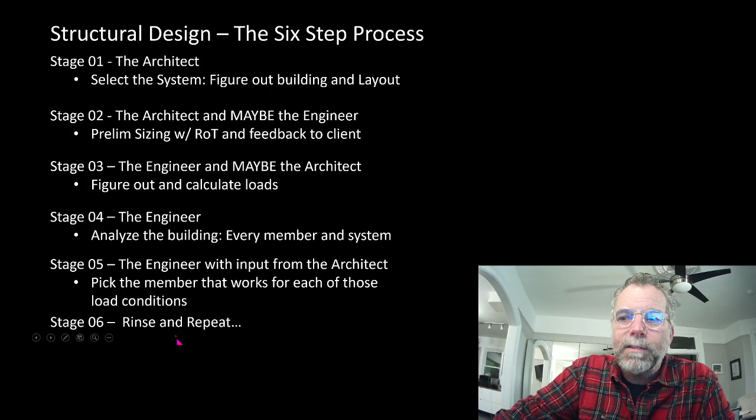Here's why we do the rinse and repeat: the member sizing that the engineer determines is going to feed back into the structural systems. It's going to have an effect on column layout, and on floor-to-floor heights. All of these things feed back into the architectural design and require modifications, which then feed back to the engineer to change. So there is a cyclic process that converges to a final answer, but we don't start there. It's non-linear.

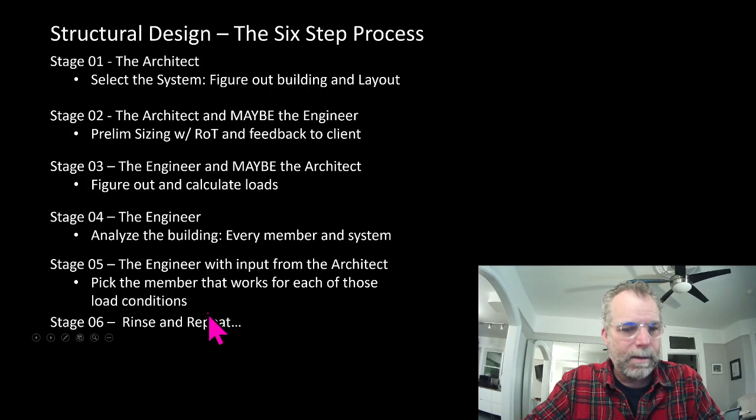So our project, this is a Center for Activism building in New York City. There is an adaptive reuse component. In an old city like New York, there is always some existing structure on every site. There aren't greenfield sites within the city of New York. And it's intended as a net zero building.

So what are the kinds of spaces that we're going to need to think about in a Center for Activism? We know there will be a big administrative function. Administrative functions need offices, so we are going to have office space, and that's going to be one type of space within the building.

We are going to have a lecture hall, almost certainly. If you're going to have a Center for Activism, you need to do community outreach and teaching, so there's going to be a need for a lecture hall. We're going to need an assembly space. This may or may not be the lecture hall, someplace to host parties and other kinds of events, fundraisers, things like this may very well be in the space.

And then there's all kinds of supporting function. There's parking, there's loading, there's all these other things that have to happen within the building.

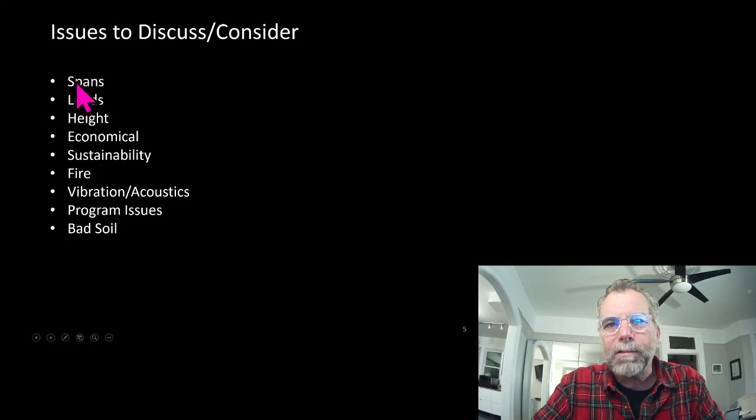So here are the things that we would have to think about. We have to think about spans. That's number one, because it's the first thing we think about, since span demands for residential versus office versus assembly differ. We also need to think about loads, because assembly areas have different loading requirements than office areas or residential areas.

We need to think about height. Height is critical, particularly in an urban setting, because often we're trying to maximize site density, and we are often within a very strict zoning envelope. So we're going to have specific height requirements for spaces. Lecture halls need tall spaces, for example, and that's going to affect our structural depth.

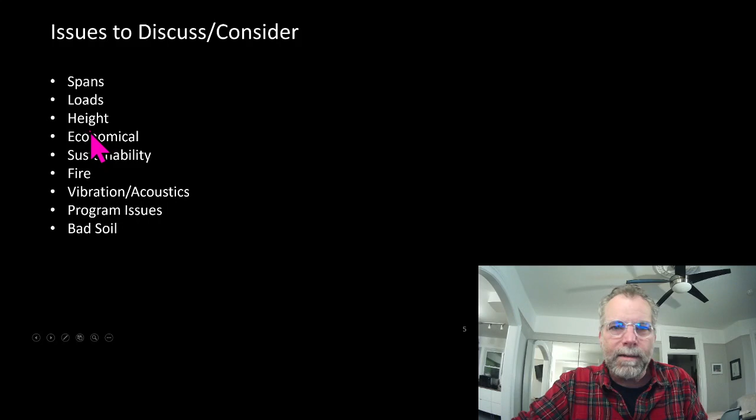Obviously, we need to think about economy. Economy is often, or historically has been, the number one consideration. We need to think about sustainability. This is 2021, it should be the number one consideration.

We have to think about fire. Our project has to be code compliant, and code has very specific fire requirements, which has a big impact on structure. Vibration and acoustics go to the performance of the building, the user experience.

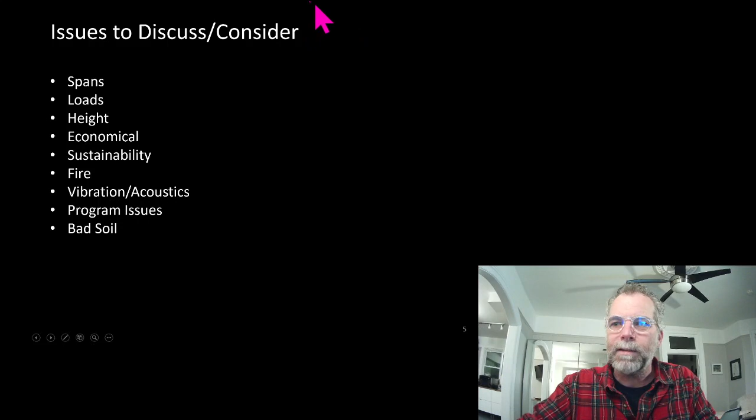Program issues we've talked about, and then we have to think about the foundation conditions. In an urban site, particularly an old city like New York, you are not the first person to build on that site, so we are going to be in infill conditions almost certainly. We are going to encounter existing foundations, and there will be site challenges.

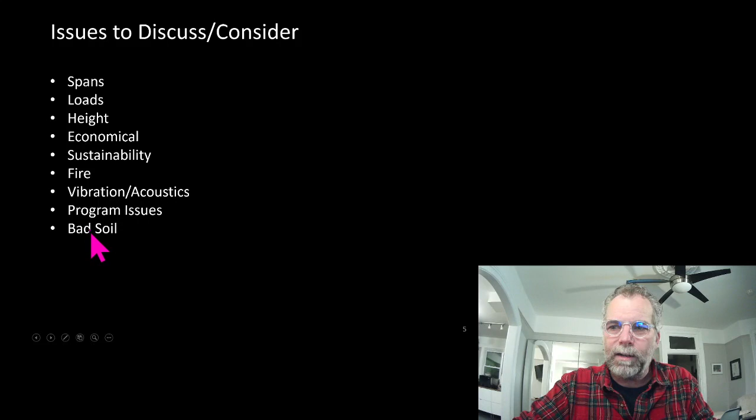So this is the next long list of considerations, the things that impact structural decisions on a building. First one is the loads. We have wind loads, we have occupancy loads, occupancy being the people, we have snow load on the roof, and we have seismic loads.

In New York, wind is probably the dominant lateral load. I'll just take a moment to point out that if we're sandwiched in a tight urban site, we don't get to design it as though we're shielded from wind. We have to consider that one or both of the adjacent buildings are going to be demolished, and we are going to be standing there on our own. So the tight urban nature of the site will generally reduce wind speeds, but the immediate context does not.

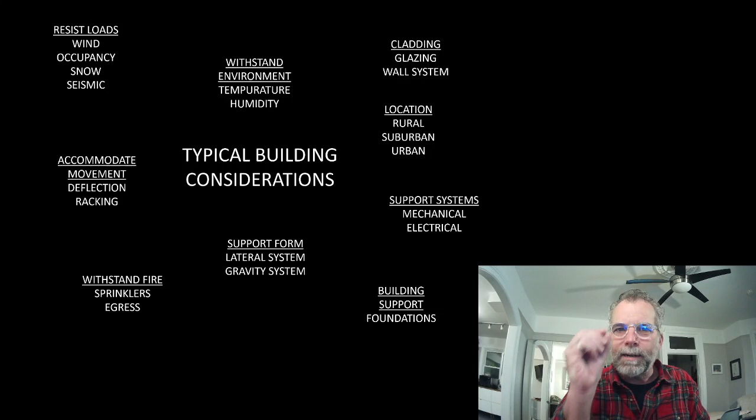We need to accommodate movement. We really have to think hard about movement. As buildings get narrower and taller, we're tightening our considerations, and movements become more and more important to think about. So that's movement relative to adjacent buildings, for example.

We have to think about fire, of course. We need to withstand the fire, and we need to maintain our fire compartments. We need a structure that will not collapse before all the people get out. We can't design a structure that won't collapse at all—they're all going to collapse eventually in a fire. But we need to make sure they don't collapse before everybody gets out. A critical part of that is maintaining our fire compartments, preventing the fire from spreading from one part of the building to another. The structure plays a role in that.

We need to withstand the environment. Now, a building like this, probably the structure is enclosed within the building envelope, and the environmental conditions are consistent throughout the life of the building, so there's not an awful lot. Where this becomes important is where we have transitions from interior to exterior. For example, we have to think about the environmental impact of uninsulated canopies, projections, and things like that.

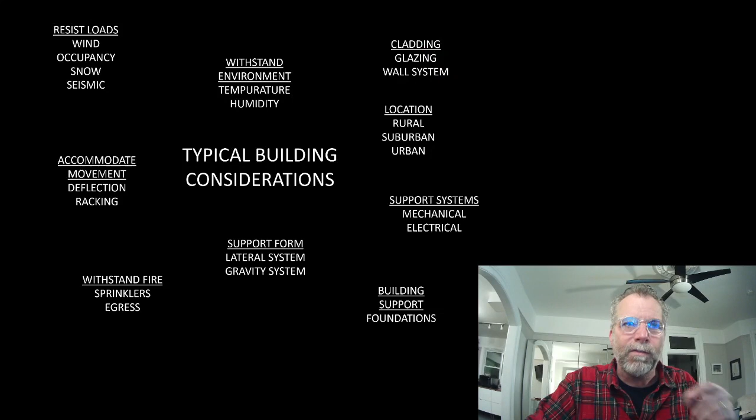We need to provide support for lateral and gravity loads. That's normally what we think of as the number one consideration, our lateral and gravity system. Structure also plays a role in supporting your cladding and wall systems, and the integration of those systems is an important consideration.

We think about the location. As I talked about with wind, there's a difference between a rural setting, a suburban setting, and an urban setting. An urban setting means we get slightly lower wind loads because the density of the features tends to damp out the wind a little bit. It does mean, though, that we don't get snow blowing off our roofs as much, and what snow falls, sits.

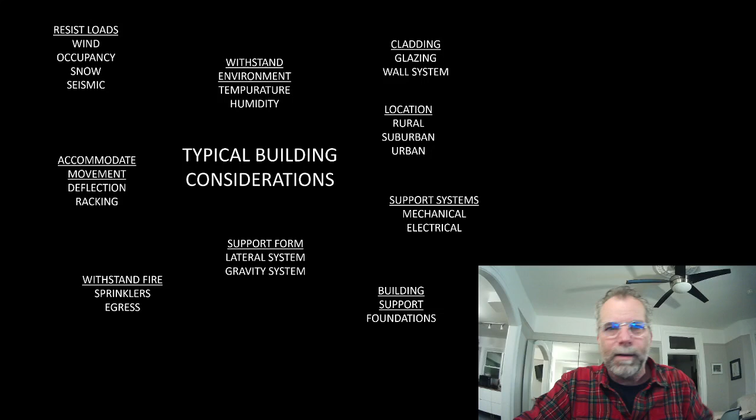We have to think about secondary support systems for mechanical and electrical equipment—so we'll have mechanical units on the roof, for example, that we have to think about. And then lastly, or firstly, we have to think about the building foundations.

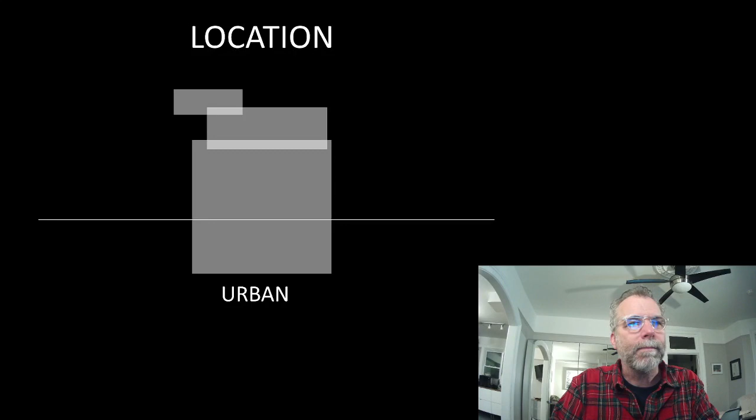So let's talk about spans. For a residential building, the norm is about a 6.5 meter span. It was always a 6 meter span, but developers have pushed that to improve the quality of space in residential buildings, where 6.5 meters is actually very common now, or 6.6 meters.

We're not in residential space. The absolute standard office grid is 9 meters by 9 meters. That's not to say some don't differ. 80 Atlantic, for example, is that wonderful mass timber building built last year by Quadrangle—that's a 6 by 6 bay. It had to be because of the structural system that was chosen.

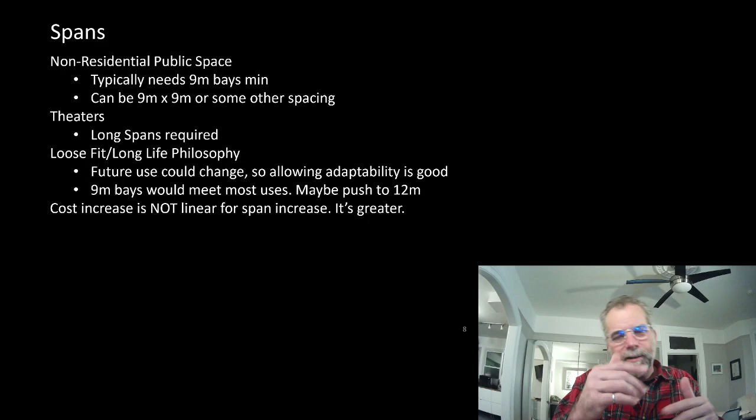And we've got luxury office buildings downtown that are 9 by 12 meters, for example, to get more depth to the core without interruption for light penetration and things. So 9 by 9 is not all office buildings, but I'd estimate it's 80% or so in a 9 by 9 bay. 9 by 9 is also very common for parking, so there's a nice integration of office over parking that happens in a 9 by 9 bay.

Theaters, lecture halls, assembly spaces often require longer spans. We don't want a lecture hall with a 9 meter bay—that'd be a very small lecture hall, and we don't want columns interrupting views. So in those types of spaces, we need longer spans. Obviously, spaces like gymnasiums need longer spans too.

We need to think about a loose fit, long life philosophy. The current use might be residential, say, so you could live with a 6.5 meter span. But if you look at downtown New York, or downtown Toronto—like the Garment District, for example—at the stock of existing buildings, a well-designed building with a 250-year life, which is our target, is going to go through multiple uses. It might be residential today, an office use tomorrow, something else after that. So it makes sense to design something generic, flexible, and adaptable.

We also should think of loose fit, long life in terms of the ability to adapt to future uses. Some materials are easier to adapt than others, and I'll elaborate on that a little bit.

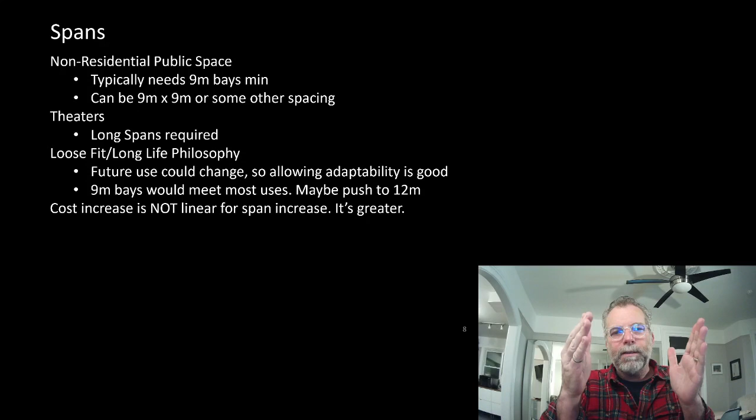I do want to point out that cost is not proportional to span. Cost is not proportional to building area, for one thing—if you change your spans, your cost changes even though your building area doesn't. Also, your quantity of material is not linear. So if you have a 10% increase in span, you might have a 20 or 40% increase in material to accommodate it, depending on what is governing the member size for that particular span.

So let's look at the various building materials. If we're talking about long spans, steel is the king for long spans. Steel can also accommodate very heavy loads.

A 9 meter span needs a depth in the 450 to 600 millimeter range, a 12 meter span is no problem at 600 to 800 millimeters. Very long spans, huge girder spans, 18 meter spans, all of these things are possible with steel. We can manufacture plate girders that are meters deep. You can see them in bridges and things. So steel is the king for long span because there is almost no limit.

Part of the reason is that steel is light as a percentage of the load on the building. So increasing the size of the steel doesn't actually increase the demand on the steel all that much; the demand is dominated by the other loads. It's also flexible for future use, so it's easy to change steel. You can cut out pieces and weld in new pieces in the field, and you can strengthen things if you need to.

When we're designing a steel building, we start with our deck and work down from there. So the decision—this is interesting.

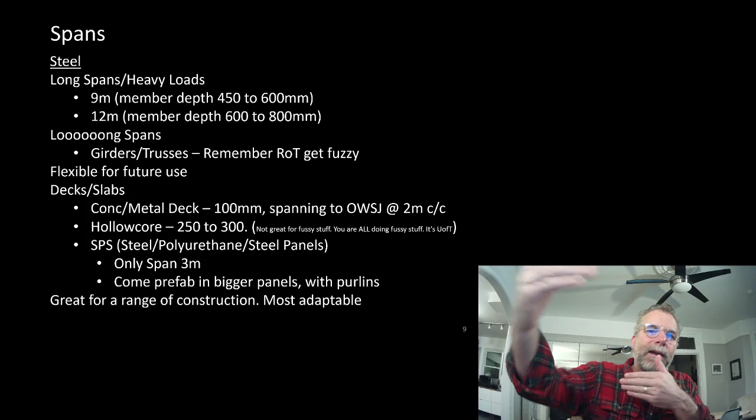That will span 2 meters or maybe a little bit less. The span of the deck sets up the spacing of our joists. Those joists then have to be supported by something—they're supported by girders. The span of the joist sets up the spacing of the girders, and the span of the girder sets up the spacing of the columns. So we start with our deck and we move down.

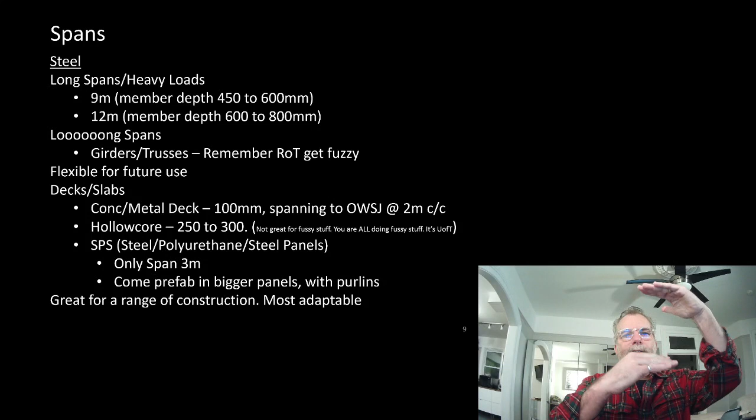Another system that is very economical is hollow core structural concrete. Hollow core concrete is 250 to 300 millimeters in depth, with big circular voids in the middle.

Remember, your mouse needs to be over here. Oh yeah, I am going to point out—

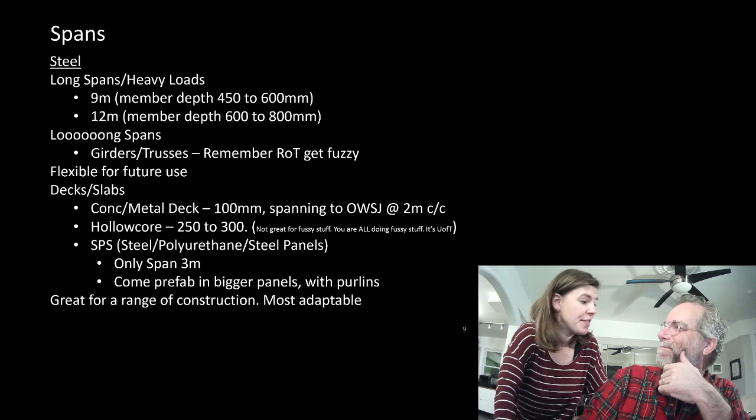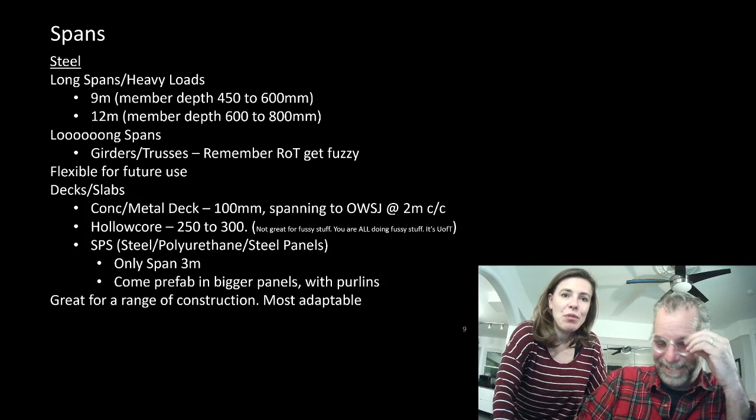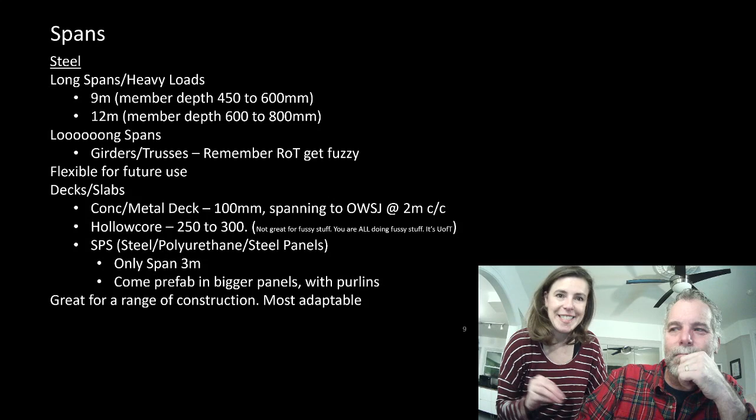Sam is not a fan, and I feel like many of the U of T profs I've encountered are not a fan of hollow core. Yeah, I'm very much not a fan. They're not a fan of bubble deck either. We're telling you this because we feel we have a responsibility to let you know what's out there. The worst thing would be for you to go out and build these things badly. Are we saying concrete is good, or the best? Probably not—sometimes concrete is the best if you could ignore the environmental costs. But the worst would be for you to build these things badly, so we want you to at least know they exist, but maybe we should be trying to move away from these things.

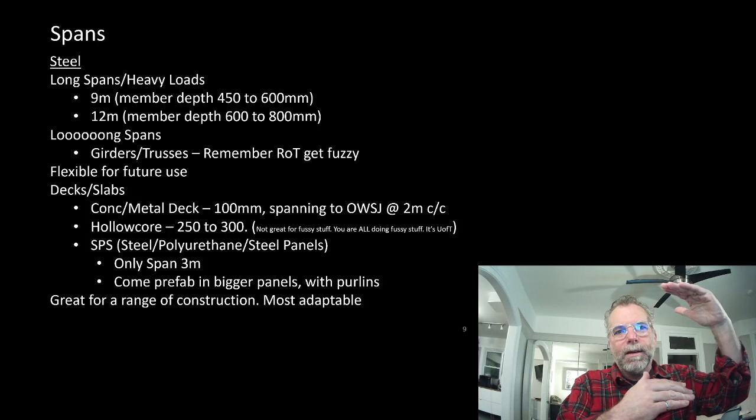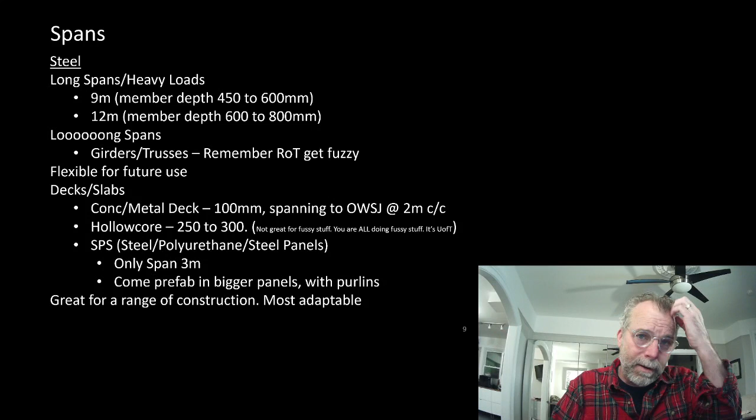So hollow core, 250 to 300 millimeters thick, roughly 30 to 50% of that is void. So a 300 millimeter thick hollow core is really only 150 to 200 millimeters of concrete because so much of it is voided. It's very effective in that respect. It'll span a long way—30 to 40 times its thickness. At the upper end, a 300 millimeter hollow core will span 12 meters.

This saves an awful lot of extra stuff like intermediate steel. We could put the steel in and save on the hollow core, but all the steel needs to be fireproofed, and all the steel gets in the way of distribution of mechanical systems. So there's something really positive about having a clean, clear soffit.

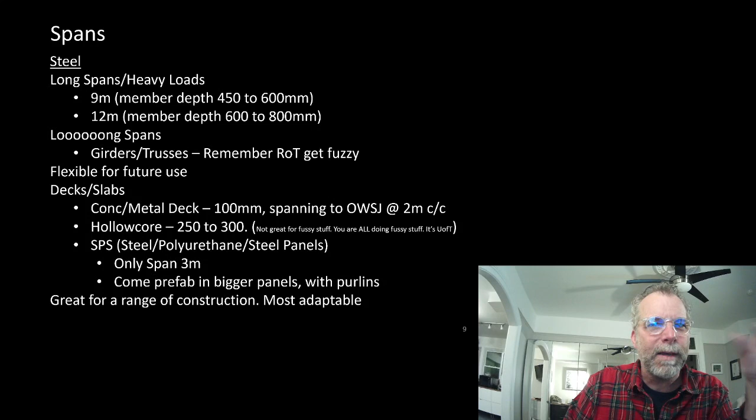Another system which has not taken off, but has tremendous potential, is the SPS system. SPS stands for steel polyurethane steel: thin steel plate, polyurethane core, thin steel plate. It's a sandwich system.

SPS spans about 3 meters, but it comes panelized with purlins already, so you wind up with a deck element that's 3 meters wide, 12 meters long. It gets dropped in very quickly, and it's very, very lightweight as a structural system.

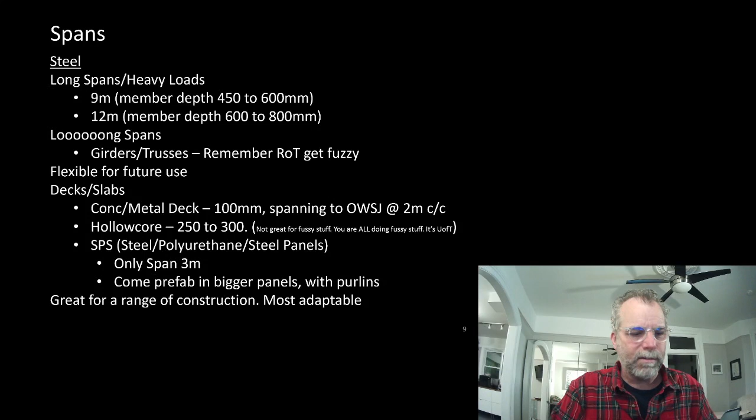Let's talk about mass timber, or wood. This almost should be 2 different slides, because there's mass timber and light wood framing, and they are not the same. They're as different as concrete and steel.

Light wood frame is small dimensional pieces arranged closely together with a thin deck of plywood or oriented strand board. It's suitable for single-family homes and multi-story residential up to about 6 stories with a degree of fire protection.

Light wood frame is combustible and needs to be fire protected. It has 0 inherent fire resistance. So if it starts, it burns. That's it. We consider it to give 0 time for people to evacuate the building.

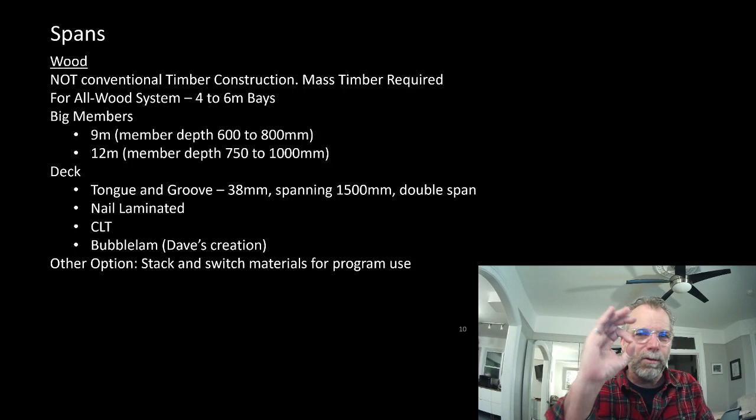Mass timber, as a basis, is characterized by large dimensional pieces glued together in solid elements with flat surfaces without a lot of protuberances. So you might have a beam, but you don't have a lot of beams close together.

Mass timber has a fire rating of 45 minutes without doing anything. So right off the bat, people in a mass timber building that catches fire have 45 minutes to get out before there's a risk of collapse. And we can add fire rating simply by making things a little bit bigger.

So mass timber and light wood frame are very, very different. Mass timber inherently has an inherent level of fire safety, and I'm going to talk about that.

This is the span section. I just wanted to say that mass timber and light wood are not the same thing.

Wood systems, mass timber and light wood, are typically good in the 4 to 6 meter bay range. That's not to say you can't do more, but that's their sweet spot, which sounds problematic for a use that has office use in it, requiring 9 meter bays. To get up to 9 meters, we're talking about big numbers.

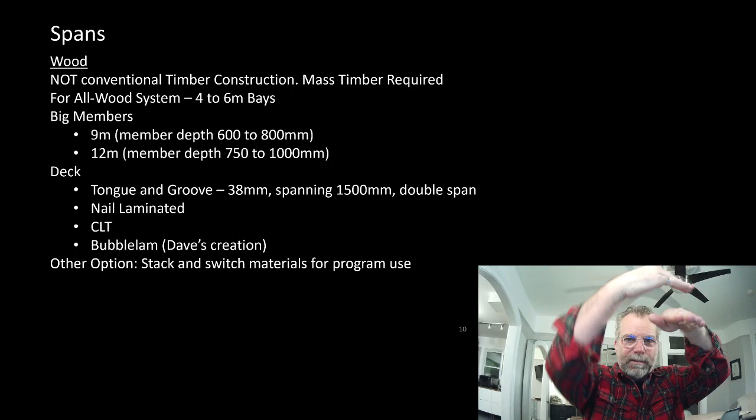Dowel laminated deck is similar, just using wood dowels instead of nails. CLT, cross laminated timber deck, uses 2x elements layered and glued together in the shop, then brought in as a panel.

Bubblelam is something that our office developed. This is a composite of steel, mass timber, and concrete. The idea is it gets rid of the beams.

So it's a mass timber panel with a roughly equal thickness of concrete on top. The concrete is voided with bubbles, like bubble deck. The idea is that it's for an asymmetric span.

In the long direction, it's composite, with wood and concrete acting together. In the short direction, perpendicular to the wood fiber and perpendicular to the wood joints, the wood doesn't do anything for you. So in the short direction, you're just a thin, wide concrete beam.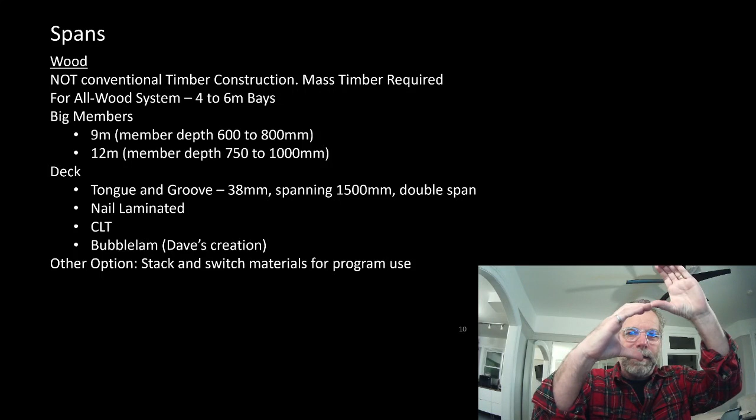By doing that, we have no drops underneath. There are no beams that drop below the wood in the bubble lam system. So the sandwich of wood and concrete is thickish, but overall the system is thin because we don't have the beams.

Got to talk about concrete and the environment for a second. We have a very uncomfortable relationship with concrete because concrete is the best building material, which I am going to get shot for saying. It's flexible, fire safe, durable, long spans, thin floor-to-floor height, good for acoustic noise transfer, good for vibration. Concrete checks all the boxes as a building material.

Here's the problem with concrete. Cement production accounts for 8% of global greenhouse gas emissions. One material accounts for 8%, because the production of cement is so energy intensive, and we use an enormous amount of it. I heard a statistic that China every single year builds as much with concrete as the US has ever built.

Enormous amounts of it. We have a worldwide sand shortage. There are sand cartels. There are people being killed over sand. The dredging and mining of sand is doing extraordinary environmental damage. Desert sand is no good for construction—it's too smooth. The wind wears it all into round marbles that don't lock together.

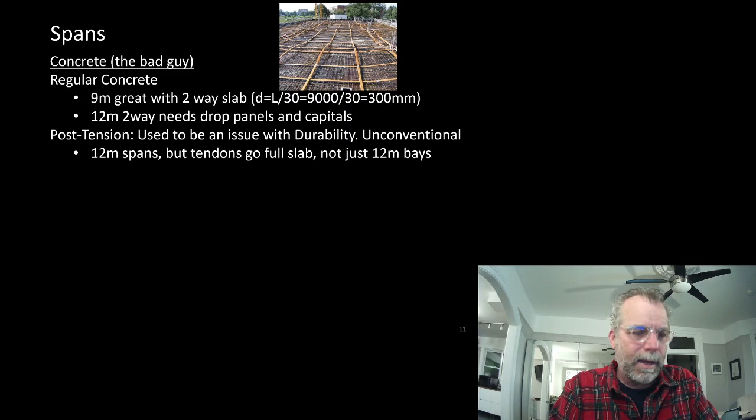From a span point of view, concrete is ideal. Like 9 meter spans, featureless, flat, clean soffit—there's nothing better than that for distribution of mechanical systems and penetration of natural light and everything else. 12 meters if you introduce drop panels and capitals. And if we want to go farther, we can introduce post-tensioning and easily get up to 12 meter bays.

We can use bubble deck. Bubble deck is a system that incorporates plastic balls—recycled HDPE plastic balls cast into the concrete—whose whole purpose is to void out all of the concrete that is not contributing to strength. So for strength from bending, the top and bottom is very effective.

The middle's not really doing very much. From a shear point of view, where we need what's in the middle, we only get something like 30% utilization, meaning we've got a lot of extra capacity in shear typically. So we put in all these voiding balls—we just take out what we don't need. And it's recycled; we're encapsulating recycled plastic, which is also a good thing.

Because it's 30% lighter weight, that means we can achieve about a 15% longer span with the same thickness, or for the same span, we can be about 15% thinner.

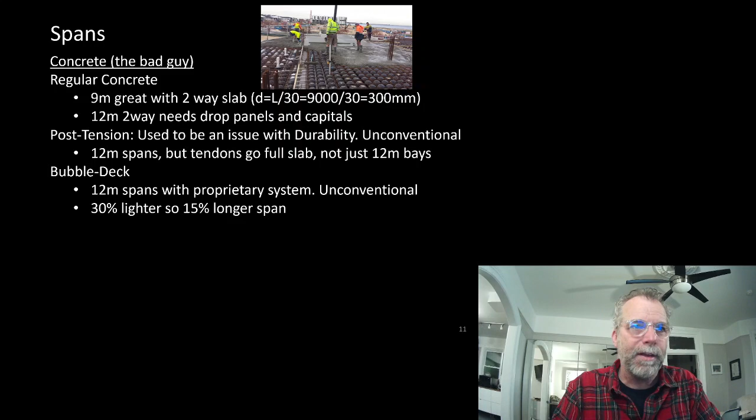Waffle slabs and beam slabs are also very effective—we can stretch out our spans and minimize material. But it's formwork intensive, and being formwork intensive makes it expensive. We're a labor economy, and anything that adds labor to the project drives up cost.

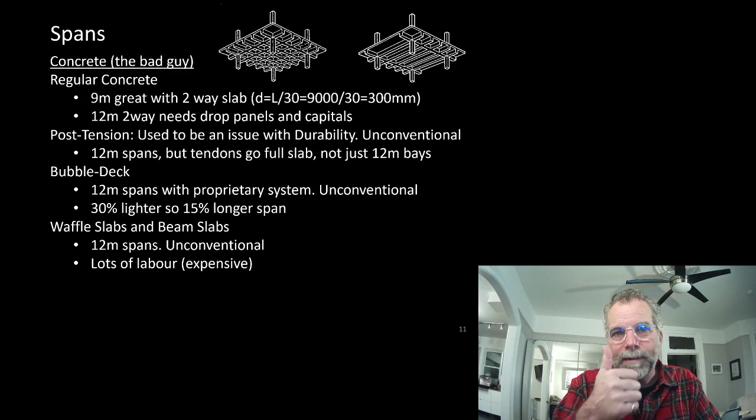So let's look at loads. For occupied public space, we generally have 2 load categories. We have 4.8 kPa, 100 pounds per square foot, for assembly areas. Assembly area includes any space on the ground floor, but also any exit corridors, stairways, anywhere people can wind up densely accumulated, as well as the obvious intended assembly areas. And 2.4 kPa for office spaces, reading rooms—like the upper floor restaurant space, as long as the area is not too large, are 2.4 kPa.

Heavy loads favor weak, stocky systems. That sounds strange, right? Why would we want a weaker system for a heavier load? Well, it's not that we want a weaker system for a heavier load. It's that the longer the span...

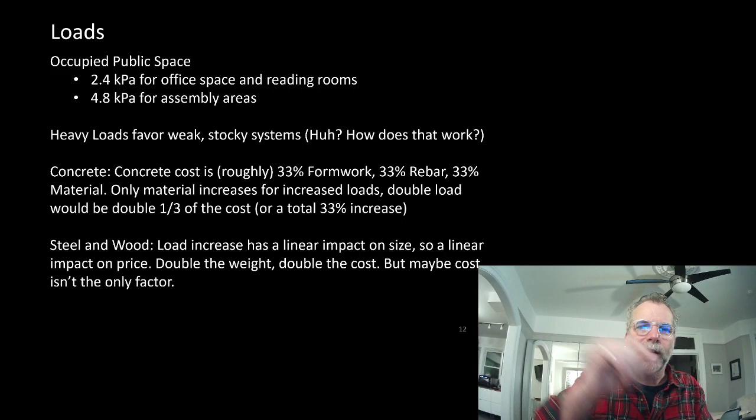The longer the span is, the more likely deflection is going to control your design rather than strength. Go even farther, vibration is going to control your design rather than strength. And so the longer the span you wind up with, the deeper the structural system, and the deeper and lighter your structural system.

With weak elements, they tend to be very stocky, so there's a lot of material packed in because they're weak, which means they are inherently better for vibration and for stiffness, because you need more material since they are weak. So this is why if you're doing an underground vault with a 10-foot span or something, then you're going to do it in concrete. That's the natural material, not that it has to be concrete, but it is the natural material.

Very light loads, very long span. If you're doing a stadium, you're going to use cables, extremely strong, but the depth is going to be large. You're going to have a depth to sag ratio of 1 to 6 or something if you're doing a stadium roof, very long spans.

Concrete, just to talk about the impact of load on cost. Concrete, we generally think, and this is a crude rule of thumb, which means that it's inaccurate but it's handy, the cost is divided roughly 33% formwork, 33% rebar, 33% concrete supply in place.

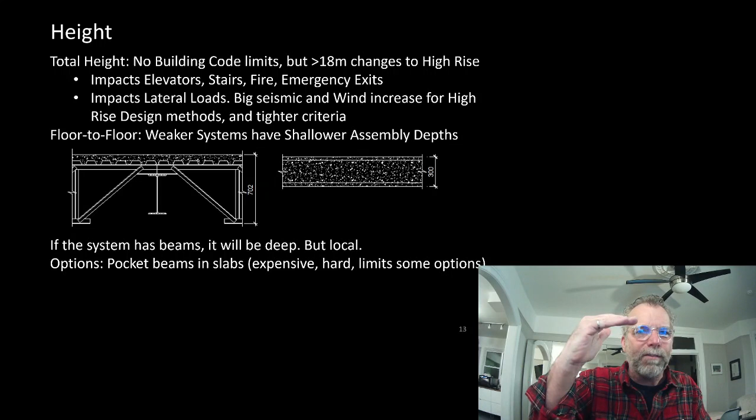We have to think about building height. This is a Toronto regulation, but New York is probably similar. At 18 meters to the top occupied floor, we become a high rise. When we become a high rise, that has an impact on stairs, elevators, emergency exits, number of stairs, exiting distance, fire ratings. There's a whole lot of things that kick in when your top occupied floor hits 18 meters. And so that becomes a very hard limit for development for a wide range of buildings.

Your wind load criteria changes when you become a high rise as well. Not that the wind blows differently on a building because it's called a high rise. The wind doesn't change when you go to 18.1 meters versus 18 meters, but building codes have to lump things for simplicity, and so that's one of those thresholds that becomes a critical threshold.

So you can imagine that if we can only get 5 stories in versus 6 stories in that 18 meters, that really has a big impact on our development potential for the site, which drives the selection of structural systems. So this 80 Atlantic project, wonderful project, Toronto's first mass timber commercial building in 100 years, 5 stories, not 6, because of the depth of structure.

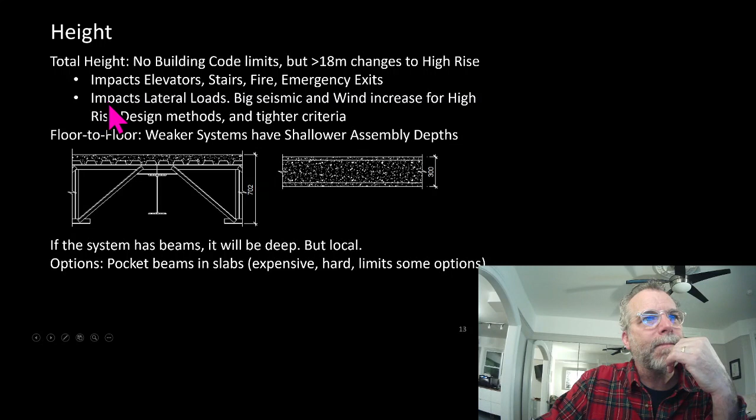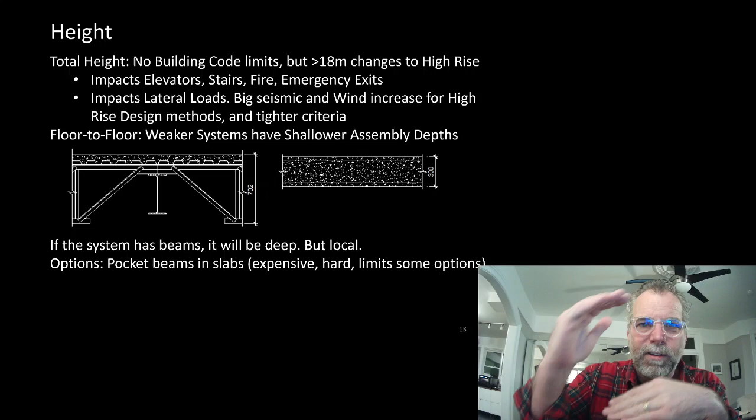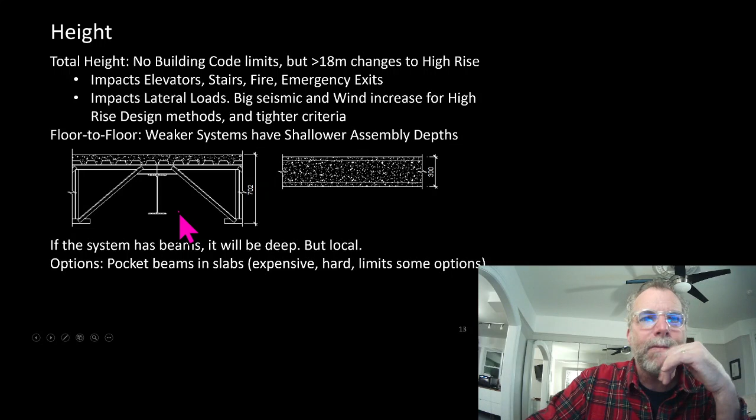Weaker systems have shallower assembly depths. I mentioned this before. So you get a weaker system, you have more stuff. When you have more stuff, it can be shallower, which is counterintuitive, but true. So when we go to a beam and deck system, our overall structural depth is deeper, even though the system is lighter.

So here are some rules of thumb. Like all rules of thumb, it is inaccurate, so do not rely on it. But it's a starting place, and it will inform your thinking.

So, less than 3 stories, steel is the most economical, non-combustible building material. Light wood frame is definitely the most economical if you are allowed to build with combustible construction.

At 4 stories, steel and concrete are about the same. More than 4 stories, concrete is the most economical. And greater than that, steel is the most economical.

Now, I'm not talking about mass timber here. Mass timber is so new that we don't have sound rules of thumb. There aren't archetypal buildings we can fall back on to say that one compares to that one. There's no apples and apples comparisons we can make. The general anecdotal rule is that the cost of the structure is about 15% more for mass timber.

That said, I have found studies that show it's less expensive because it's faster, and if you take into account financing cost savings, you'll get benefits. But there are a myriad of things implicated in that. We also have examples where it's double, because if you compare a mass timber building where the mass timber is exposed, meaning it's intended to be expressed and built to an architectural standard, to a meat and potatoes concrete office building, the mass timber building is going to be substantially more expensive. So we don't have apples and apples comparisons, but the rule of thumb is it's about 15% more expensive.

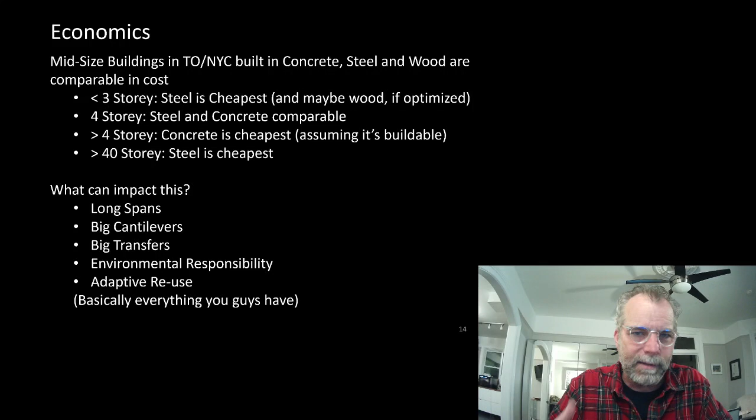Sustainability. Engineers are trained from the beginning to minimize material use, so that's already the objective, which is one of the number one things we can do for sustainable design. But other considerations: steel has a high embodied energy per unit weight of material, in fact extremely high. The thing that saves steel is that you don't need very much of it on a kilogram per square meter basis.

Concrete has very high embodied energy - we talked about the energy demand in cement production. Wood is carbon negative. So 1 cubic meter - this is another anecdotal rule that doesn't actually bear perfectly, but it's close enough - 1 cubic meter of wood will encapsulate the carbon from 1 ton of CO2. So wood winds up being, as a building material, carbon negative.

When we started doing life cycle analysis in the 90s, the capital cost of the project - the embodied energy of construction - was so small relative to the embodied energy of the building over its life cycle that it wasn't really worth considering. It was always just a gesture. Now we have net zero energy buildings, and we know how to do that - if there is a will, it can be done. When you're building a net zero energy building, the carbon capital of the construction is 100% of the life cycle carbon cost of the building, so we have to be extremely sensitive to it.

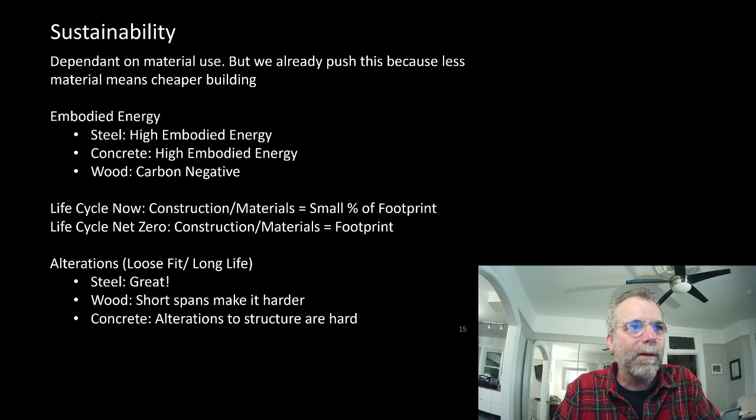Other things that impact sustainability: thermal mass. Concrete has a high thermal mass. The fact is, so does wood. Wood has a higher thermal mass per kilogram of wood than concrete does. That said, we use a quarter of the weight of material in wood than we do in concrete. So the thermal mass of a concrete building is higher, but not because the material is higher, but because we use so much more mass.

Steel is extremely high, but we use very low mass. Concrete is highly conductive, so that thermal energy is easily accessible, whereas that's not the case with wood.

Steel has a very high recycled content, like something like 95%. But the energy in reprocessing the recycled steel is extremely high, and so the embodied energy of recycled steel is not that much higher or lower than the embodied energy of steel made from raw ore.

Wood is the best from a sustainability point of view, as long as it's coming from sustainably managed forests. There are people who say that forests are not managed sustainably, and we need to stop cutting down forests. But in fact, Canada's forests generally are growing, and something like 96% of Canada's forests meet the Forest Stewardship Council's sustainable management criteria.

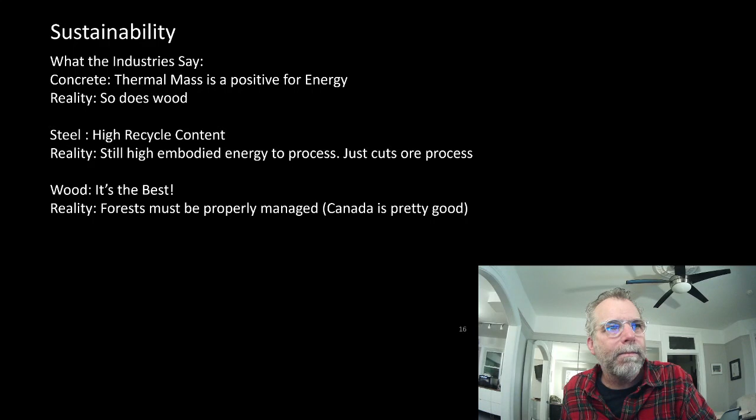Think about fire. Concrete is inherently non-combustible and fire safe. Not the same thing, because wood is combustible and fire safe, or mass timber is, but concrete is non-combustible and fire safe. Non-combustible meaning it doesn't contribute fuel.

It's easy to achieve long fire ratings by changing the rebar cover. You get nominally 45 minutes or something with 3/4 of an inch or 20 millimeters of rebar cover. If we double that to 38 or 40 millimeters of cover, we can have a 2.5 hour fire rating. So we can get very fire safe structures with concrete.

Steel is non-combustible, doesn't contribute to the fire, but is extremely sensitive to fire. When you heat it up, it loses stiffness and strength very rapidly, so a steel building is very vulnerable to collapse in fire unless it's fire protected. It needs to all be encapsulated in gypsum wallboard or spray cementitious fireproofing, or at the expensive end, painted with intumescent paint.

Wood is combustible, meaning it contributes fuel, but mass timber is inherently fire safe. It takes 45 minutes for it to sufficiently weaken the mass timber building to be a danger to its occupants from a structural point of view. Wood burns at typically about 40 millimeters per hour, so if we want to give occupants an extra hour, add 40 millimeters of wood on all surfaces, and you buy your occupants an extra hour.

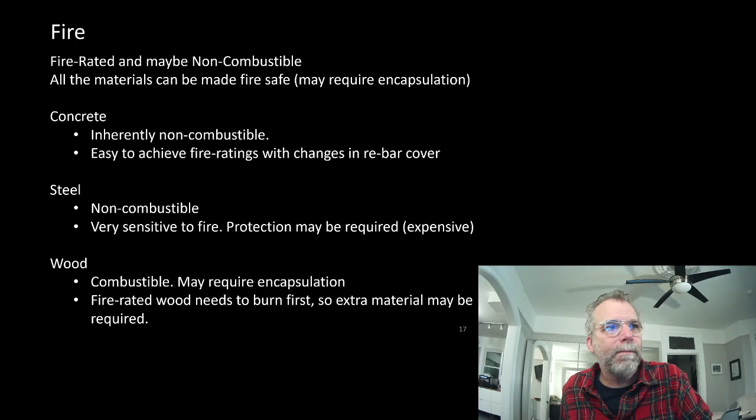Vibrations and acoustics. All building materials are acoustically reflective, which means we need to acoustically mitigate, doesn't matter what we're building with. In a concrete building, we hang acoustic panels. In a wood building, we hang acoustic panels for exposing the structure. Steel needs to be fire protected anyway, so typically we have a ceiling, and so we can incorporate acoustic reflective mitigation into the ceiling.

From a sound transfer point of view, that's a reverb issue, a sound reflection phenomenon. Sound transfer between floors or through walls - the thing we need more than anything is mass, which means that concrete is the best. All concrete systems inherently have enough mass to control sound transfer.

With wood, we need to add the mass, and there's a range of techniques for adding mass, but far and away the dominant one is you add concrete. So if we're building a mass timber building and we want to manage acoustic sound transfer, we're adding something like 100 millimeters of concrete on top of the mass timber.

Steel is similar, but typically with steel we have at least 65, maybe 75 millimeters of concrete on top of our metal deck, and we have a ceiling. So with structural steel, by the time we add up all the elements in the assembly, we are in that range of 100 millimeters effectively of concrete.

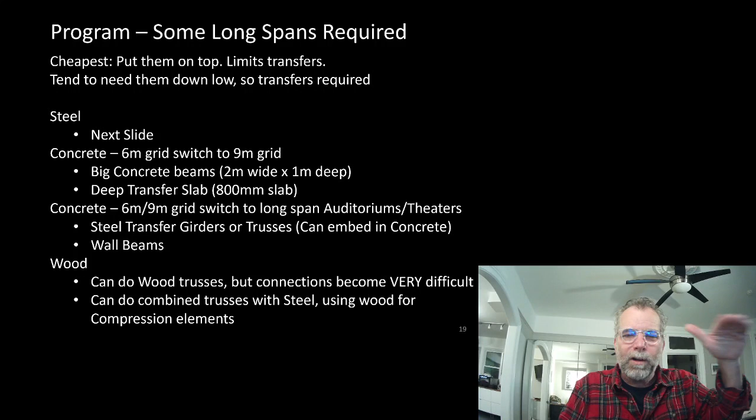Typically what we try to do as step one is put the long spans on the roof, because now you're not carrying floor over a long span, you're just carrying a roof. On a roof, we don't worry about vibration, we tolerate more sag, and the loads are lighter.

So we start with that question. Really, for assembly spaces, we always want to be on the ground floor, which means our second floor is where we migrate between our big span and our smaller spans. In a condo building, it happens at the ground floor, because we have 9 meter bays for parking and 6 meter bays for residential use, and we mitigate that at the ground floor.

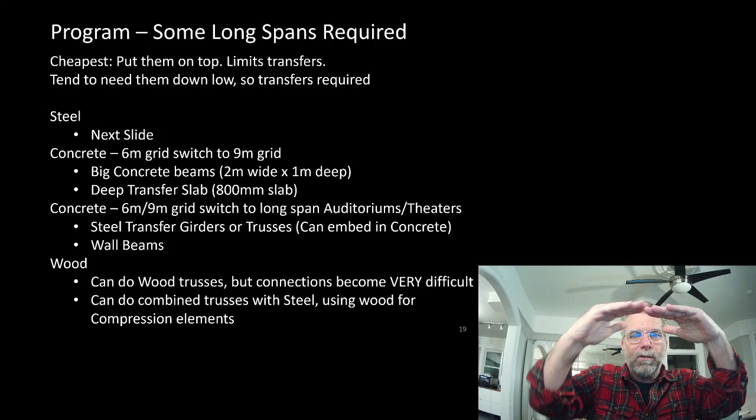So we manage that change using transfer beams, transfer slabs, and girders. In concrete, they can be big concrete beams and girders. In a steel building, they're obviously just bigger steel beams - we buy a little bit of extra height. In wood, they're rarely wood; you rarely can do a transfer beam in wood, so we wind up introducing steel into our building to accommodate the exceptional conditions. This is where we start hybridizing our building.

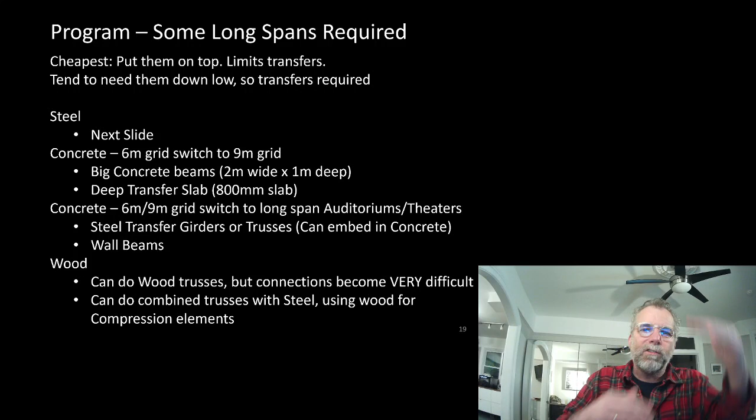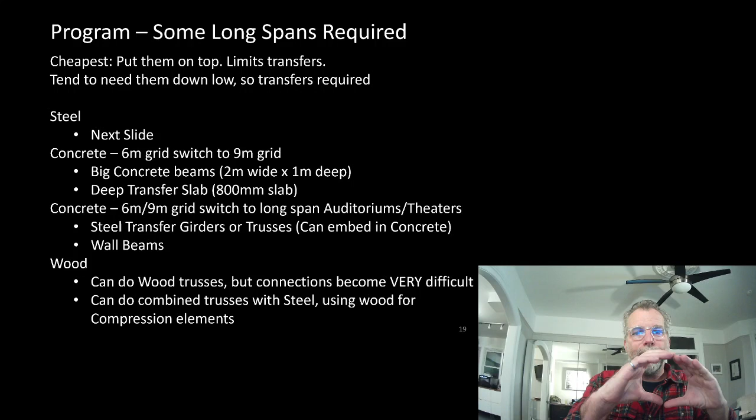That said, I talked about bubble lam earlier. One of the things it's intended to do is mitigate that, so we don't need to change our system. If we migrate to a bigger span, we just change the proportion of concrete to wood - we make the overall system deeper. If we need to accommodate a transfer, maybe we wind up with 600 millimeters of concrete on 300 millimeters of wood, and concrete is doing all the work, but we haven't changed our system - the workflow is the same.

So what are some other ways? We talked about introducing a transfer level - that's one way of mitigating it. But if we want long spans, we can also look to opportunities in the floor-to-floor range, so doing floor-to-floor trusses.

Just to put that in perspective, I should talk about the Goldring Athletic Center. The field house is in the basement - that's our long span, 54-meter clear span, which is our courts. Above that we have the gym and offices, which were tighter spans in the 6-meter range.

So at Goldring, we looked for the floor with the tightest program, which was the 4th floor - that was all offices. We said let's put a bunch of trusses in here because we can always get a door through a truss, and made the trusses full floor-to-floor height, 3.2 meters deep. They go right from the 4th floor to the roof, spanning the 54 meters, and the floors below are actually hung from those trusses.

On the sides of the building, we didn't have the clear span, so the truss went full height - 12 meters, a 4-story or 3-story high truss on the two sides of the building, but interior to the building it was 1-story high.

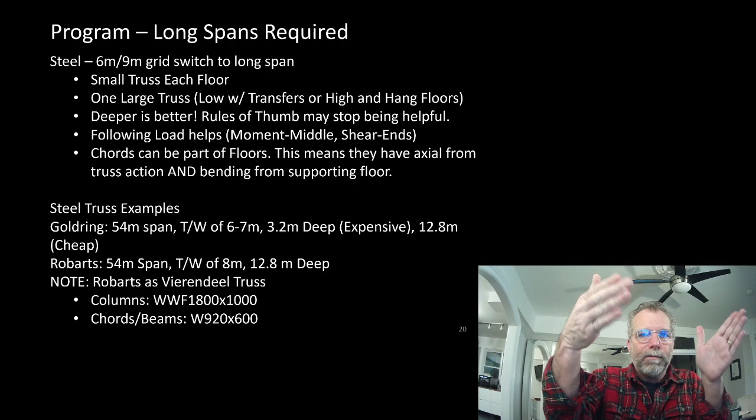I'm going to show you this interesting image.

The project started with an idea of just a big glazed wall. I mean, you'll see that it is a big glazed wall, but it was just to be a big glazed wall. So we looked at a Vierendeel truss. Do you know what a Vierendeel truss is? It's a truss that has no diagonals - those pesky diagonals that get in the way.

The image on the bottom was a Vierendeel truss. This is the image from our structural analysis software, showing the actual proportions of all the members. So it worked - a 4-story deep Vierendeel truss, it worked.

The image above is what it turned into. We went through a value engineering exercise and introduced strategic diagonal elements within that elevation in order to save steel, and you can see that it saved an awful lot of steel. So Vierendeel trusses are possible, but they are by no means a panacea.

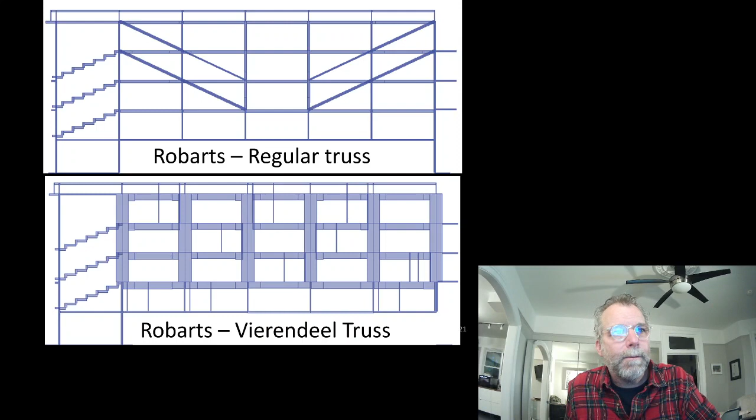We've got to think about the soil conditions. As I mentioned before, on a dense urban site, you are not the first person to build on that site - probably not even the second. In New York, as in Toronto, that might not have even been land when they started building on it. It may very well have been reclaimed land that was a filled pier or something. So you're not going to be on a nice bed of glacial till - you're going to be on some mucky, weird mix of stuff, old foundations and rubble, and that's going to have an impact.

So what do we do when we hit bad soil? Well, we can build typical foundations and just make them big sometimes - sometimes what's there has some bearing capacity, just not a lot. We can use caissons. Now, caisson is kind of local vernacular in southern Ontario.

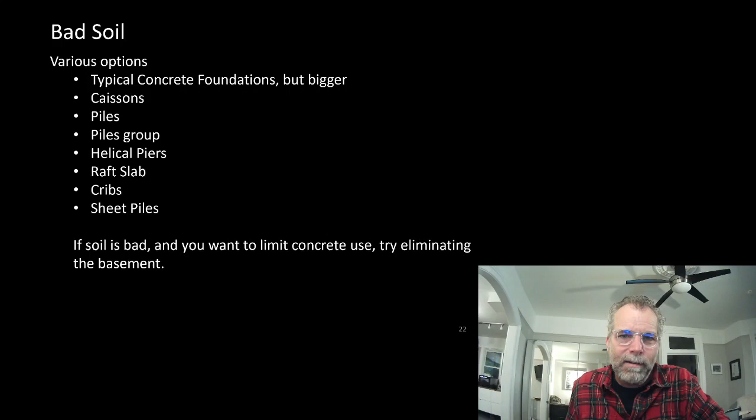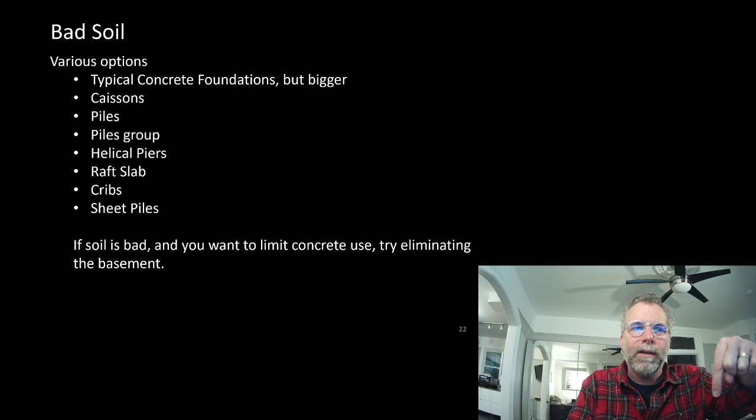A caisson is a drilled pier. You auger a big hole and fill it with concrete, making a pier that's 750 millimeters in diameter or bigger - that's what we call a caisson, what other people would call a drilled pier. We have piles too. We distinguish a pile from a drilled pier because a pile is driven, not drilled. I'll show some images of this.

Piles, or driven piles, are a soil displacement strategy as opposed to replacement. You don't take anything out, you just drive a pile in like you're driving a nail. There's a range of solutions there, from timber piles through precast piles. Piles are great until you hit boulders - if you've got boulders, you can't drive a pile, and that's problematic. But otherwise, piles are very effective.

I should say, when it comes to timber piles - wood is like steel, it needs oxygen for decay, just like steel needs oxygen for rust. If you're in an environment with no oxygen, you're not going to get decay. So Queens Quay Terminal Warehouse on the waterfront in Toronto is on timber piles. That building was 100 years old when they turned it into condos and added a bunch of stories. It's fine on timber piles, and it'll be fine for the lifetime of the building.

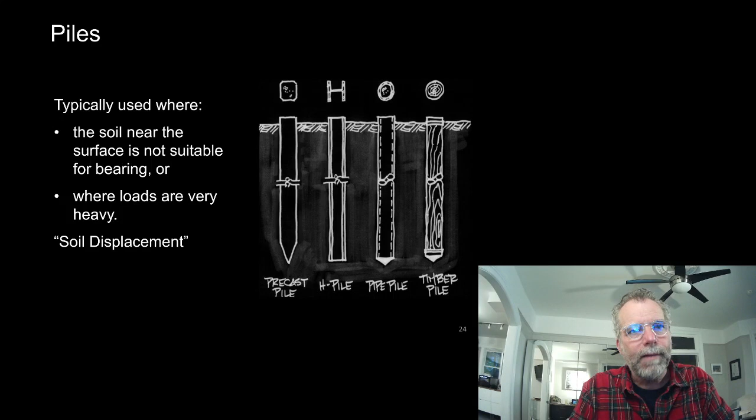And so what we do with timber piles is we take them up to about a meter below grade, and then we put a durable cap on - that would be like a pile cap, something that doesn't rot, concrete.

So here's pile groups with a concrete pile cap. Typically, the pile cap is also down below the frost level, because frost will get under and jack it, so we go below the frost level with our pile cap. The pile cap takes a very heavy load and distributes it to a number of piles that have finite capacity.

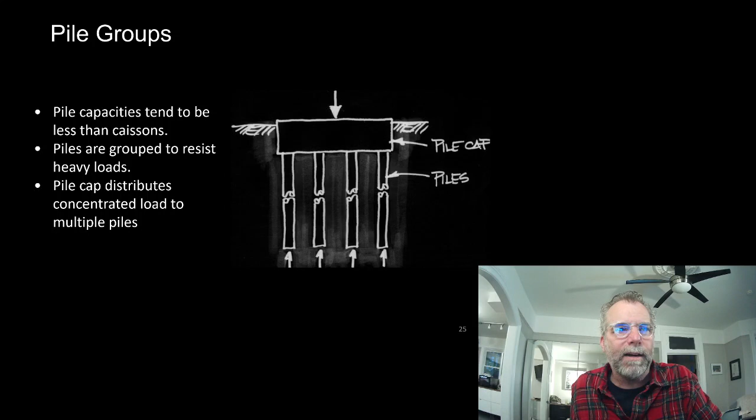Helical pier. This is another soil displacement strategy. It essentially corkscrews down into the ground and bears load on each of the successive helices. You can have 1, 2, or 3 helices depending on the capacity you need. These are a tremendous alternative for difficult, tight sites.

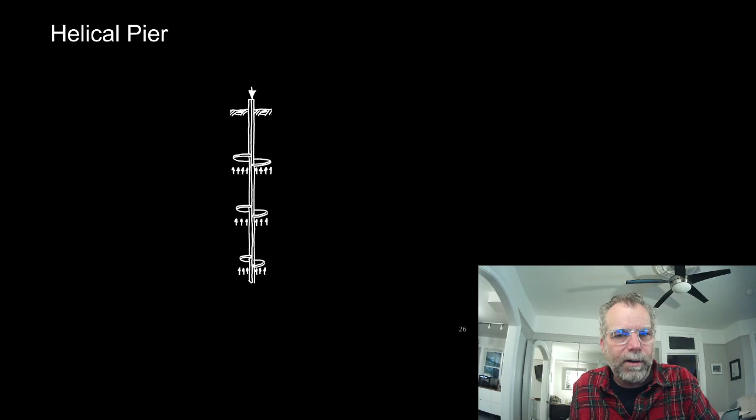A mat foundation: if you've got poor soil, but not that poor, so you can still bear on it, but your footings get so big they start to merge with each other, then you pour a mat foundation—just one big raft of concrete underneath the whole thing.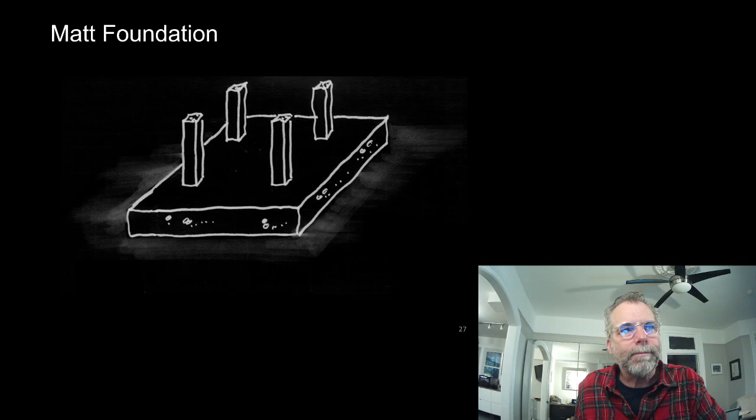So what do things look like from a structural framing point of view? Here's what our design process typically looks like in my office: it's 3 steps, notwithstanding the 6 steps Shannon said earlier—slightly different thing. Understand the precedent, refine as appropriate, innovate when necessary.

First thing we do is ask how this problem has been solved before. If it's been solved a bunch of times, and most of those times it's the same solution, chances are that's the best solution. The reason every condo building in Toronto is cast-in-place concrete, 8-inch slab, 6.5 meter bay, is because that's actually the best solution from a wide range of factors.

So that's why they're all done that way—we look at the precedent first. We'll find that the precedent has conditions not reflected in our own situation, and we'll have to modify our system to suit our existing conditions. Then we'll find some conditions on our project where there's no precedent like it, and that's where we have to innovate—we have to invent a solution.

So the first thing we do is look at how things have been done before. This may very well be a category 3 situation, where one of our driving constraints is net zero, and we need to build in mass timber—Shannon has given you access to a lecture the two of us did on mass timber last term, so you should watch it. If that's a driving constraint, it's a new one not reflected in the precedents, and that's where innovation may be required.

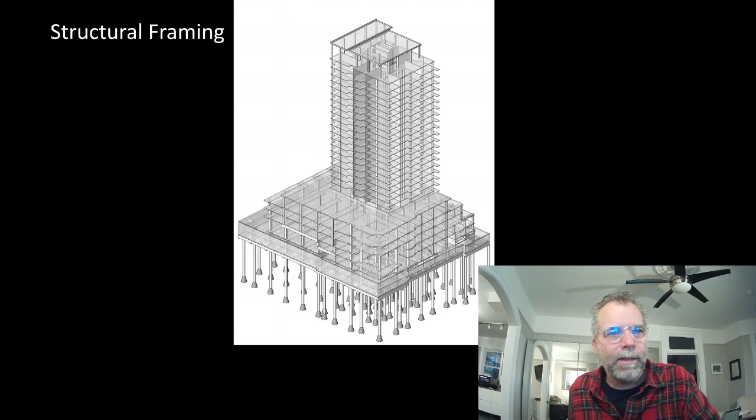So a few images of structural framing. This, of course, is a concrete condo with a concrete podium on drilled piers. These are bell caissons, so you can see the little fattening on the bottom—they just use a particular type of auger that allows them to fatten the bottom and provide a bell.

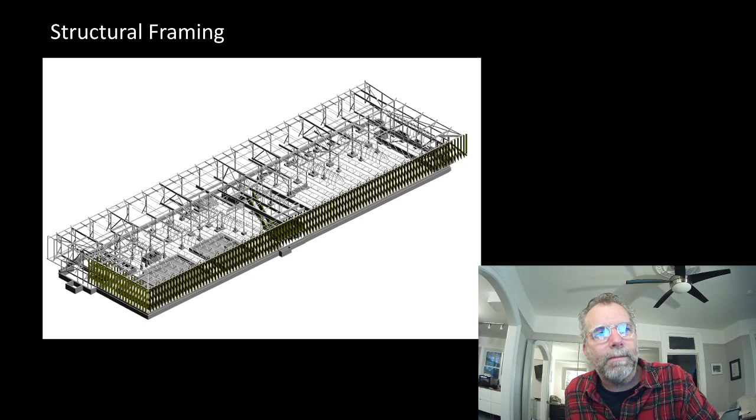This again is a steel building. This was actually a concept for a project in China that Shannon and I worked on together, where we had very dense, tight spans—residential program above and retail below—so we had to negotiate a very big change in span at the ground level.

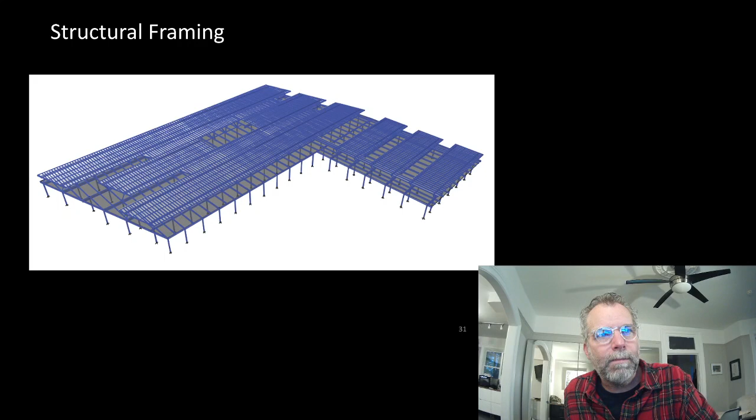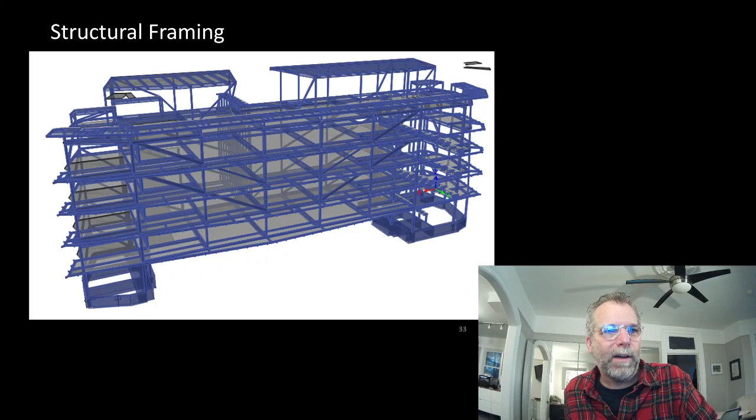I'm just going to talk about this one quickly. Not that you necessarily have this, but these folded plate roofs, think hard about this. When you fold a square plan, you put a fold in it diagonally and make it into a butterfly. You need support along that diagonal, and the span of that diagonal is the square span times root 2. It's more than 40% longer than the direct span.

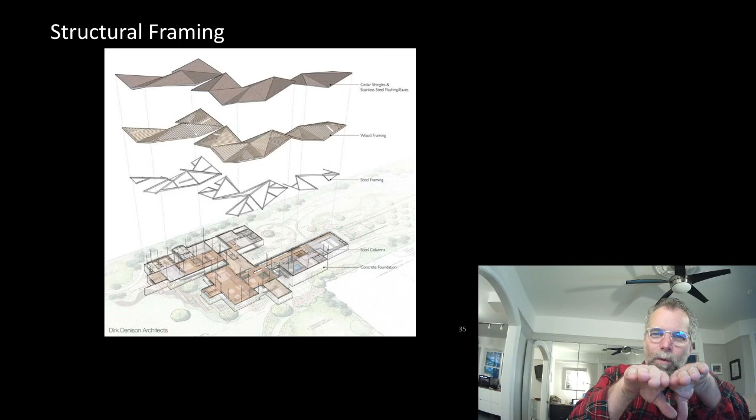And so that becomes a very heavy element. Often when you're doing this, the need to fold it is a formal move that you can't perceive from anywhere. You don't see it from above, you don't see it from below - there's a hanging ceiling. You don't see it in elevation either, because what you see in elevation is all your eaves.

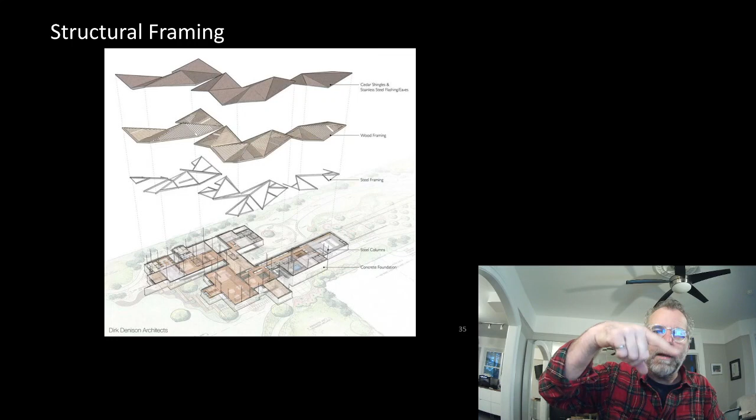You can create the same boundary condition connected with straight members, oriented like a hyperbolic paraboloid. So you just change the pitch of each member as you go along in a particular beam, in a particular bay - I'm talking about this bay, for example. If you did that, you could match all the same constraints as this solution without that giant beam.

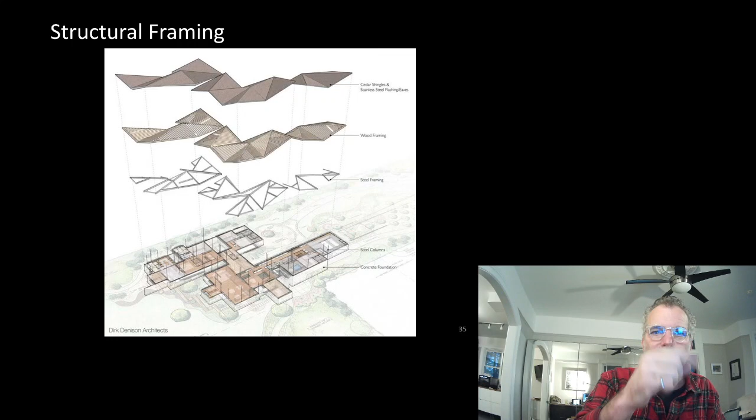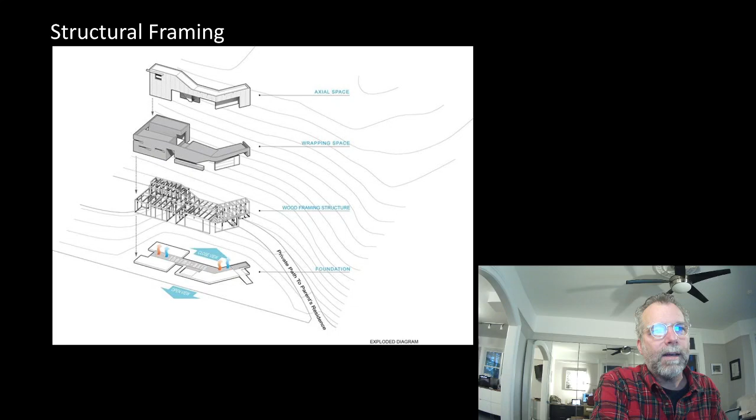This is just an interesting way of thinking about structure and how buildings are assembled.

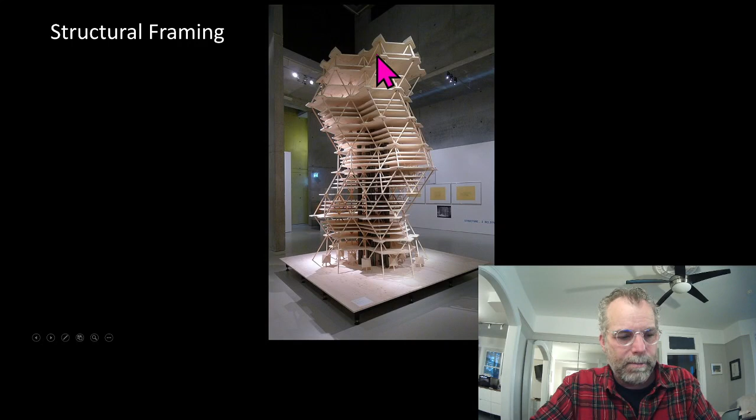Okay, that's my last slide. Thank you for bearing with me through a long list of considerations. This is a recorded lecture, but I am looking forward to talking to you and answering questions after your session this morning.